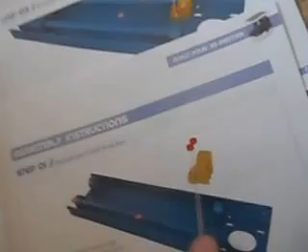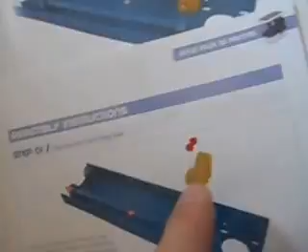First of all, we've got in issue 3, we've got this bit here where you put the Y shaft and the linear bearing blocks, that bit there, and you've got another bearing block there. You screwed it in, and then you have to take it out again, which is, I don't know, quite hard to see there - that's the bearing block. So basically you screwed it in, and then you have to take it out again to put the Y shaft, just that in.

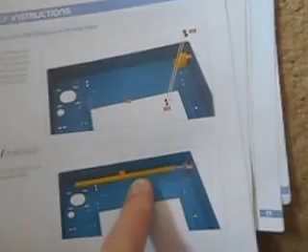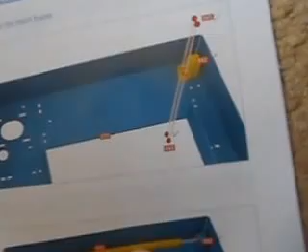And then again, they kept on doing this in issue 16 and 17. You fitted the shaft fixing base, you fitted the top shaft, and then you fitted the one on the bottom.

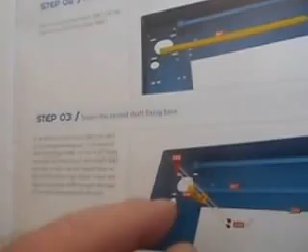And then you fitted the shaft fixing base, and then you had to take it off. So you had to undo the bolts just so you could fix the linear bearing block, which is that bit there.

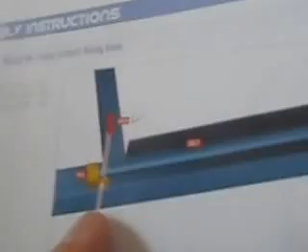Then again, in issue 24, you fitted the Z shaft and the two shaft fixing base, and you had to undo the screws just so you could fix the Z-axis linear bearing block. So you're putting screws in, fixing stuff together, and just having to take them off again.

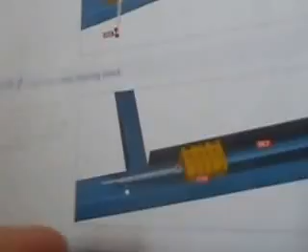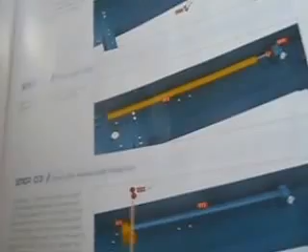In issue 26, again, you fitted shaft fixing base there and there.

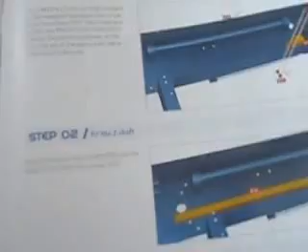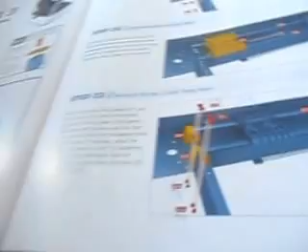And then in issue 27, you fitted another shaft fixing base and the Z shaft, and then you had to undo all them screws just to fit the linear bearing block, just that.

So why couldn't they supply the linear bearing block before you fitted the shaft fixing base, which are these bits here?

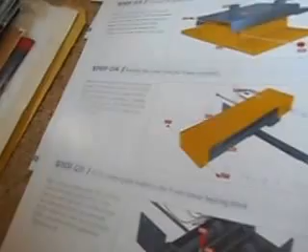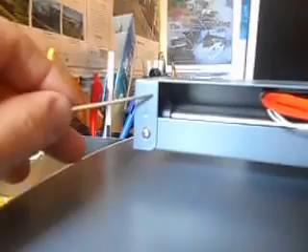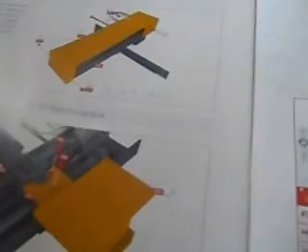A different part of the build - you had to put it on in issue 12. Basically, you've got this bottom bit here and this top bit here. So you fix the bottom bit to the top bit just to take it off again, so you can actually get inside. So you're fixing bits together, and then you have to take them apart.

Issue 48, you have to fix on the control unit front cover, which is this bit here. The way to fix it up, you've got some screws there,

but you had to put on these feet here in an earlier issue, both sides, but then you had to take these two feet off, because there's a screw right underneath it - just about to see it. So you take the feet off just to get to them screws.

Again, when you're fixing the control unit rear cover, which is this front bit here, you have to undo these feet so you get to that screw there. They've done this the long way round.

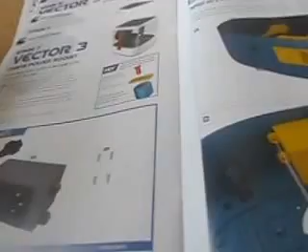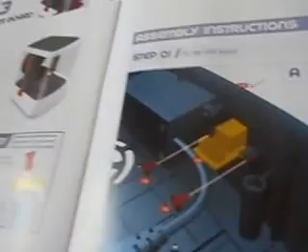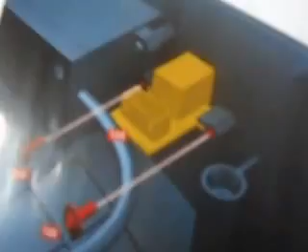So in issue 51 and 52, first of all they supplied you the main power socket, which goes there in the diagram, but in issue 52 they fitted you the USB board, which goes in that slot there, but it's really difficult to fix because you can see that wire there - it gets in the way of fitting. You can see the wire just going like that, and that was the only way you could try and fit the USB board there, but it's really hard.

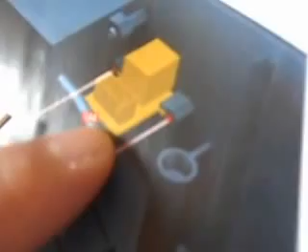The best way I found was to take the mains power socket off.

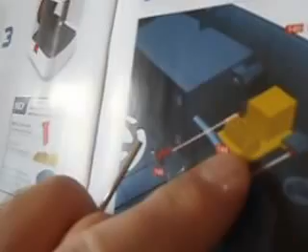So just to fit the USB board, what they should have done was supply... Issue 51 should be supplying the USB board so you could fit it there, and issue 52 should have been the main power socket. So that's the main power socket, that was 51, and this is the USB board, which is 52. Really that should be in issue 51, and that should be in issue 52, because it was really hard to fit. They've done that the wrong way round.

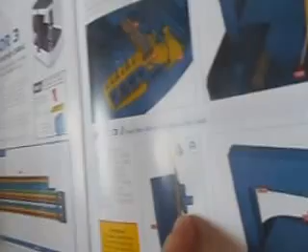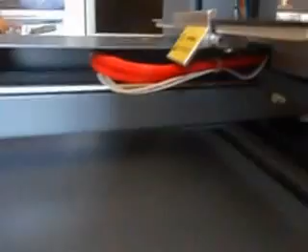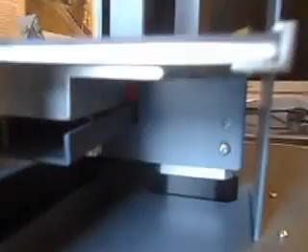All in like this red wire here. Basically, I have to take this whole section off because they replaced... I've already done a video about this, I'll put a link on it. But they replaced the build plate. So basically I had to take this off the heater plate, and then there's this metal one underneath, and take this top plate off here.

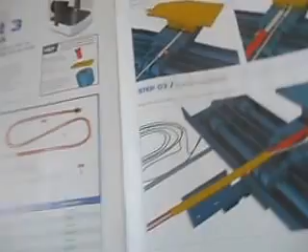Looks like this was originally... see, this is in issue 36. So originally part 98 was a heater, so that red wire there, and that's a new one there. The heater clamp. Wire protection coil, wire strengthening clip, small cable tie.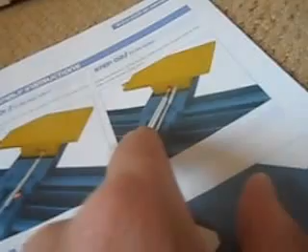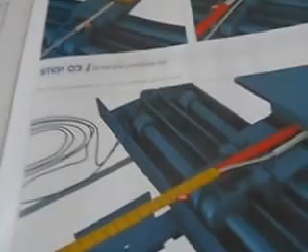Basically, this was the most fiddly, difficult bit to build. You might not look at it, but it was. You had to put the wire in, and then there's like a plastic wrap, the wire protection coil. So that's where after you fitted the heater, the red wire there, and the heater sensor, which is the white wire, you have to put that next to the wire strengthening strip, and then you have to wrap it round. It was the most difficult bit. Fix it all together, and then...

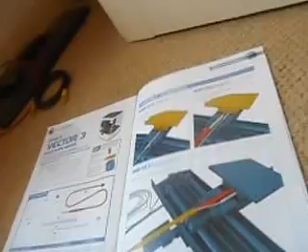In issue 70 they decided it wasn't working too well, so you have to undo it all. So you undo those bits, take it all apart, work that section apart, and then fit all the new wires, and put it all back together again.

Issue 74, which I've not got yet because that will be coming tomorrow.

Well, that's 74. As you can see, that's the filament spool. Basically, you have to fix it all together. So that's the middle bit where the filament wraps around, and you've got to fit that bit onto those two bits. So those round plates go on one side, and the round plate goes on the other side. You fix it all together. But then, once you fix it all together, next week you have to take it apart just so you can fit... say that's how that will look like. So after you fix it together, you've got to take one side off just so you can put the filament on again.

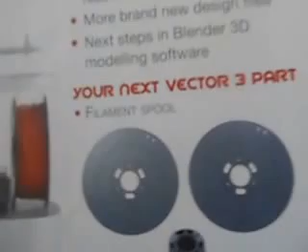So I keep on saying, they build things together just to take them apart to change things inside. Why can't they make it so you don't have to do that? I hope you understood that, but that's my little rant over.